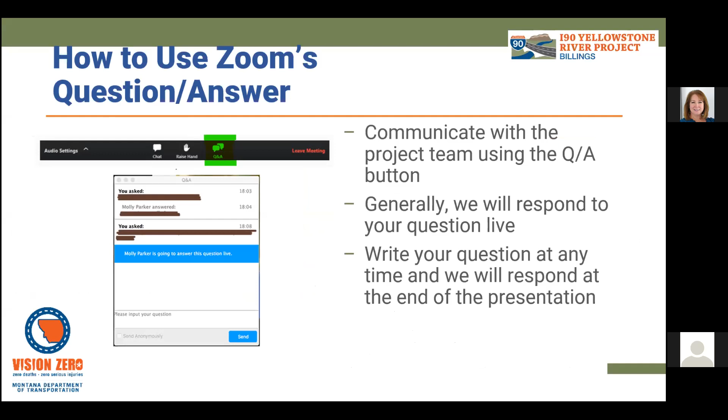The project team consists of consultants working collaboratively with the department, including Rod Nelson, MDT District Administrator for the Billings District; Mike Taylor, MDT Billings District Pre-Construction Engineer; Mark Studt, MDT Consultant Project Engineer; Dustin Hirose, HDR's Project Manager. Next is our road design lead, Tessa Wermers, who works with Sanderson Stewart, HDR's teaming partner. Lastly is Jon Schick, HDR's environmental lead. You've already met me, Lisa Gray. I'll be your point of contact.

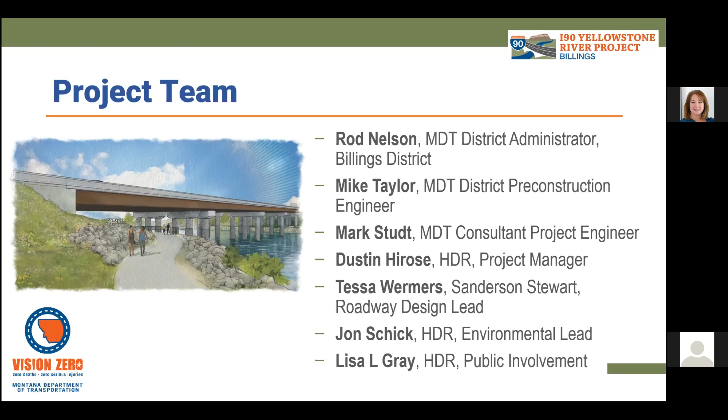Thank you, Lisa, and thank you everyone for joining us today. My name is Mike Taylor, and I'm the Billings District Pre-Construction Engineer for the Montana Department of Transportation. Public involvement is a vital component of MDT's project development process, so we're very appreciative of the opportunity for sharing information about this project with you, and in turn we'd like to hear your questions, comments, and concerns. I'll give you a brief overview of the I90 Yellowstone River project, and then Dustin Hirose with HDR will be presenting the project design in more detail. The entire presentation should take about 30 minutes, and then we'll open up to questions and comments.

The project is led by MDT in cooperation with the Federal Highways Administration, Yellowstone County, and the City of Billings. The Montana Department of Transportation has contracted with HDR to be the lead project engineer, as well as the public information coordinator. The goal of the project is to meet safety and capacity needs on Interstate 90 in Billings. We plan on doing this by widening I90 from 2 lanes to 3 lanes in each direction between the North 27th interchange and the Lockwood interchange. We'll also need to reconstruct the bridges over the Yellowstone River and the Talen Energy Railroad Spur line.

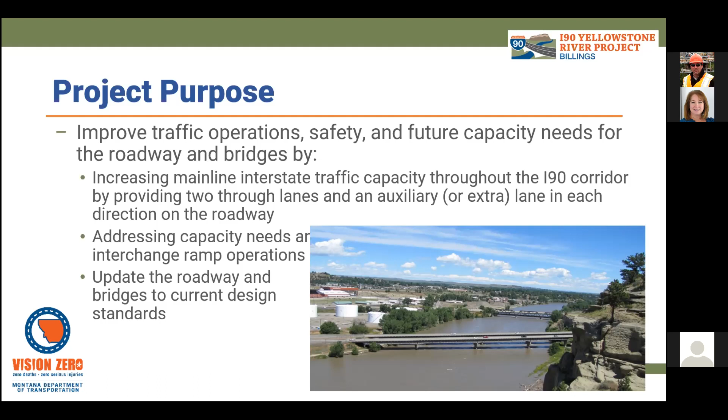So with that, Dustin will speak to you about the project in more detail, but again, please don't hesitate to give us any questions, comments, or concerns that you may have. If you prefer, you can email the project team at any time after the meeting. The project contact information will be shown at the end of the presentation. Thank you again, and I'll turn it over to Dustin.

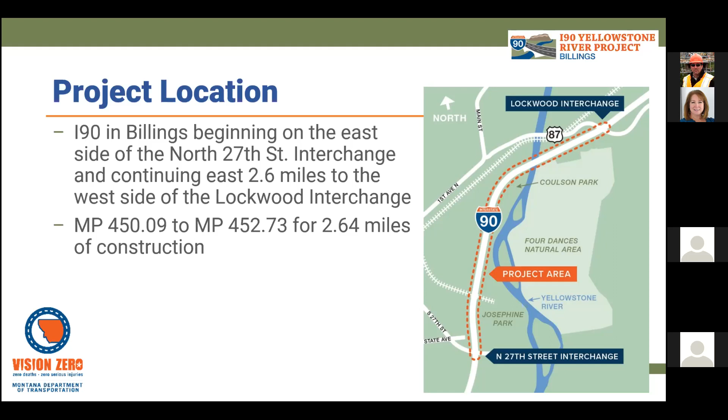Thanks, Mike, and thanks, folks, for joining us on this presentation today. Just to recap the project location, because we do have a few projects out there, and to avoid confusion, our project, the I90 Yellowstone River segment, is located on I90, within the city limits of Billings. Our project begins at the top of the 27th Street interchange, then heads north, or eastbound, over the Talen Energy Rail Spur, over the Yellowstone River, and ends at the top of the Lockwood interchange. Technically, our project begins at milepost 450.09 and ends at milepost 452.73, for about 2.6 miles worth of work.

A little bit of history about the project: it really began back in 2012 upon the completion of the I90 corridor planning study. That study looked at roughly 20 miles of interstate through the Billings area and how the interstate would be impacted by the anticipated growth in the area. The goal of that work was to identify needs along I90 that could address operational issues, possibly safety issues, and ultimately capacity needs associated with that growth. As a result of that study, multiple projects were developed, and our project, the I90 Yellowstone River Bridge segment, is one of them.

This section of interstate was originally built back in the 60s, and there's been some miscellaneous work since then, some pavement maintenance, and some guardrail updates on the bridges, for example. But it was last paved back in 2000, and the infrastructure is aging and in need of improvements and upgrades.

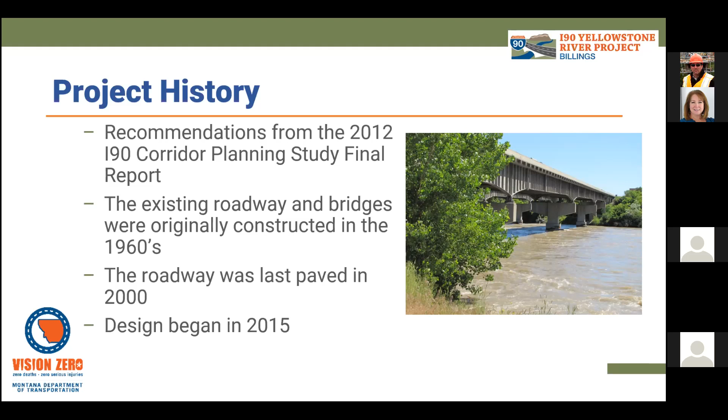Since the planning study was completed, MDT nominated this project for development, and the design began back in 2015, which is when our design team became involved. As it stands now, we're at the very final stages of design. In fact, we're going to be submitting final plans and specifications in about a month, at the end of March. The plan is that we would go to construction in the fall of this year, fall of 2021, and we'll talk about that a little bit later in the presentation.

So a description of the work we're going to do: in a nutshell, we're going to widen the interstate from 2 lanes to 3 lanes. Right now there's 2 lanes in each direction, and we're going to add additional capacity by providing an additional lane, so there'll be 3 lanes in each direction when it's all said and done. Doing that work, we'll update the roadway to meet current design standards.

We're replacing the bridges over the Talen Energy Rail Spur, and one of the focal points of the project is to replace the bridges over the Yellowstone River. In fact, that's a rendering of what those new bridges will look like on the right-hand side of the slide. Replacing those bridges is about half of the total project construction cost, which right now is coming in at about $60 million.

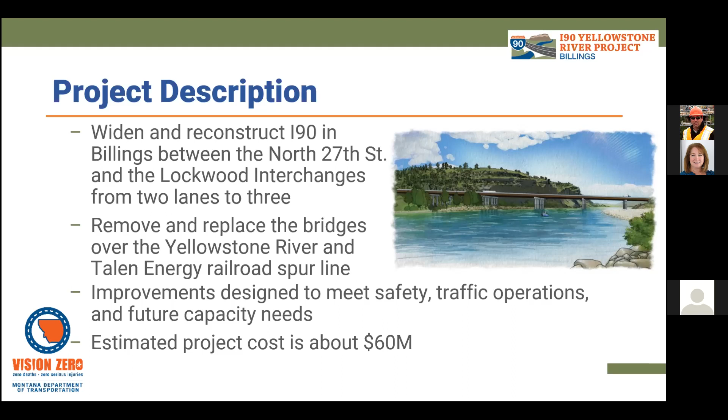Okay, so a little bit of detail about the Yellowstone River structures. Down on the bottom of the slide is a photo of the existing bridges. Those bridges are functionally obsolete, mainly due to inadequate roadway width, and there's really no practical way to reuse them or widen them to meet current needs cost effectively. So really the only option here is to replace these structures.

And in fact, we're going to do that with 2 bridges. There'll be a pair of bridges about 1,000 feet long. It's important to note that we've gone through pretty extensive evaluation of different bridge options for this site, looking at multiple span configurations, different structure types, and construction methods and cost. What we've zeroed in on is a new 6-span structure, with piers located to minimize impacts to the river and provide a balanced, cost-effective design.

Just to clarify, when I say minimize impacts to the river, the configuration we've chosen allows for conveyance of river flows, ice and debris, the types of things you'd expect on the Yellowstone River. But it also provides a reduced footprint compared to the existing bridges, which minimizes impacts on the environment, of course.

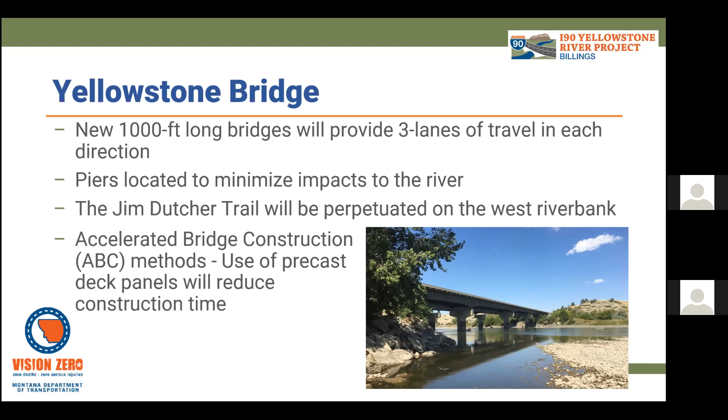In order to do that, we've worked with MDT to incorporate means to accelerate construction, and we're going to do that by using precast deck panels. Compared to the traditional method of building a bridge deck, where you need to form it, place rebar, pour concrete, and allow the concrete to cure, the use of this precast deck panel design should significantly reduce the construction schedule and reduce the risk of construction extending into the winter season, because we really want to avoid having traffic maneuvering through crossovers or in a head-to-head configuration during that winter shutdown period.

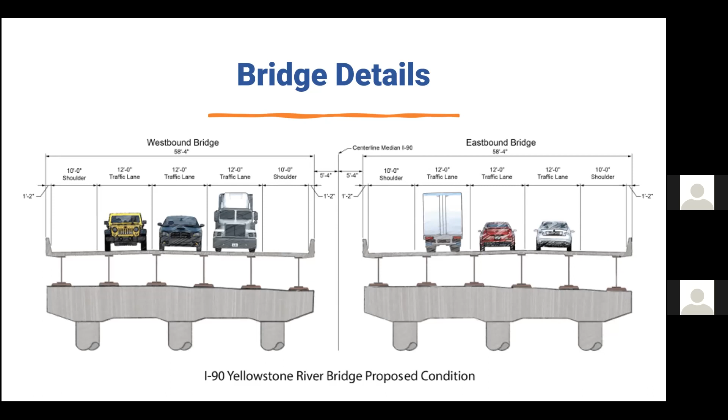In this case, we're going to replace these structures with a precast buried concrete arch. This arch structure allows us to upgrade the roadway to meet current design standards without having to extend the roadway construction work a significant distance on either side of those existing structures. So from the driver's perspective, you may not even really notice that there's a structure there now.

It'll kind of feel and look like the roadway is just perpetuated over the railroad tracks. Technically speaking, we're correcting the roadway super elevation, which improves safety without the need to raise the elevation of the roadway through that area.

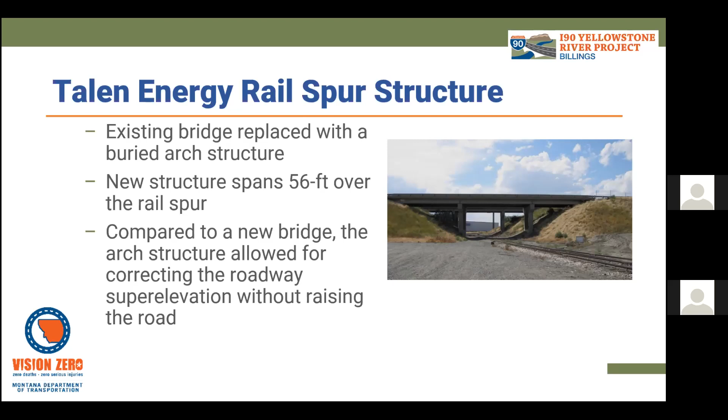And so with that, I'm going to pause and turn it over to Tessa, and she's going to tell you a little bit about the roadway design. Great, thanks, Dustin. Hello, my name is Tessa Wormers. I work for Sanderson Stewart, and I am the road design lead on the project.

The design speed along the interstate for the project design is 70 miles per hour. And the posted speed limit will remain at 65 miles per hour for all vehicles, including semi-trucks.

The I90 roadway will be reconstructed and an auxiliary lane will be added in both the east and westbound directions, as Dustin mentioned earlier. The auxiliary lanes will be constructed from the 27th Street interchange to the Lockwood interchange. The widening for the extra lanes will occur to the inside of the existing driving lanes. This minimizes the need for new right-of-way, and in general, the design for the entire project stays within existing right-of-way.

We will improve the safety of the road by flattening slopes and improving the bank of the roadway around the horizontal curves. We also provide barriers to separate and protect traffic. The pavement thickness is designed to accommodate the high volume of truck traffic along this section of the interstate. A new storm drain system will also be constructed to minimize ponding along the roadway. The concrete barrier will be built in the roadway median to provide separation between opposing directions of traffic and to reduce headlight glare.

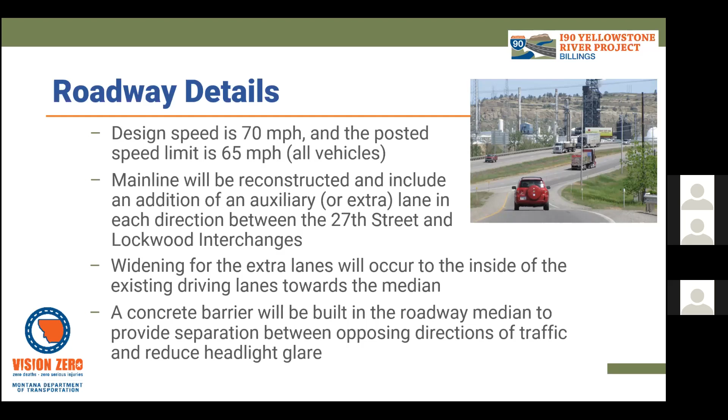The on and off ramps on the east side of the 27th Street interchange and the ramps on the west side of the Lockwood interchange will be reconstructed with this project. A second exit lane and dual left-hand turn lanes will be constructed at the Lockwood interchange eastbound off ramp. The additional lanes better accommodate traffic demands and the high volume of semi-trucks at this location. A second exit lane will also be built at the 27th Street interchange westbound off ramp to accommodate traffic demands.

This is one of the few areas along the project that will require new right-of-way acquisition for the construction of this second exit lane. I will now turn this over to John to discuss the environmental aspects of this project.

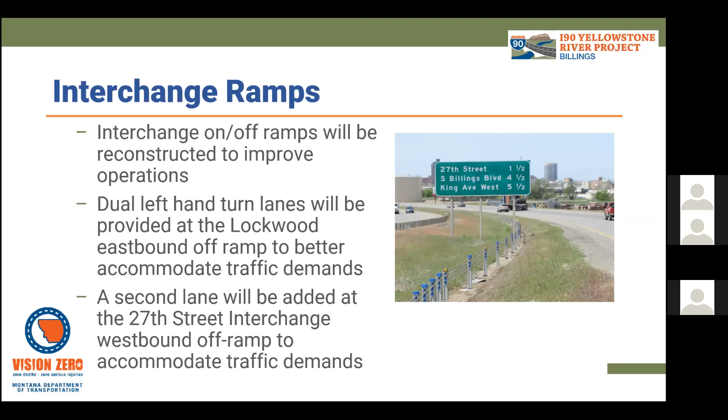Thanks, Tessa. Hello, everyone. My name is Jon Schick. I work for HDR, and I'm the environmental lead. I wanted to speak to a few of the environmental considerations for the project.

The project is receiving federal funding, and that triggers a review under the National Environmental Policy Act, or NEPA. Similarly, it's receiving a smaller percentage of funding of state dollars, which then triggers a review under the state Montana Environmental Policy Act, or MEPA.

The NEPA and MEPA compliance was accomplished through a categorical exclusion level of environmental document. This document and the environmental process in general looks at a broad range of resources and assesses the project's potential impacts to those resources. The categorical exclusion was completed in March 2019.

One of the predominant natural resources in the project area is the Yellowstone River. Just the nature of the project and the replacement and construction of new bridge structures requires kind of a strict adherence to certain conditions related to maintaining the quality of the river. This project will seek to minimize the impact on the river through use of environmental standard specifications and special provisions, which are essentially directives that will be given to the construction contractor to follow certain state and federal environmental regulations and procedures.

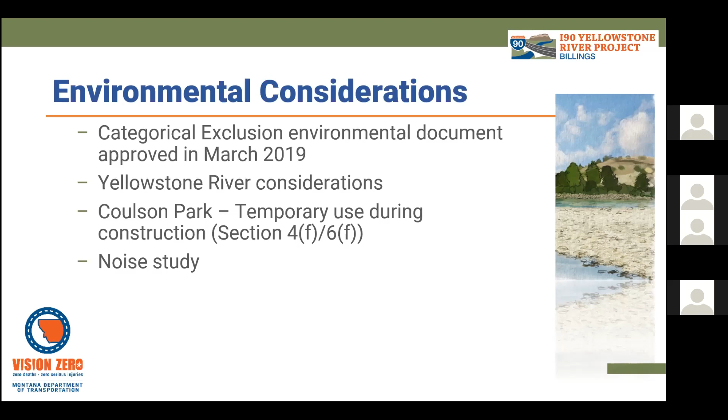Thanks, John. Regarding the project schedule and next steps, as I mentioned earlier, our plan is to begin construction this year, in the fall of 2021. The design is essentially complete, with final designs being submitted at the end of March, and between then and the fall the project will be packaged up and advertised for bidding.

This fall, we hope to begin work by building some traffic crossovers and irrigation crossings that go underneath the interstate to set the stage for the main work in the 2022 construction season. The first part of that work will include building the westbound facility, which will take most of 2022. The following season, 2023, we'll build the eastbound facility. Ultimately, there'll still be a need for some cleanup, final striping and signing, which will occur in the final phase in 2024.

During construction, we're going to be maintaining two-way traffic at all times. During the winter shutdown period, our goal is to open up the interstate again fully so there are 4 total lanes, 2 in each direction. We're currently looking at options to navigate oversized loads through the project area during construction, and we have a plan for an emergency detour if there's an accident or the interstate needs to close for some reason, with a contingency plan to manipulate traffic around that area.

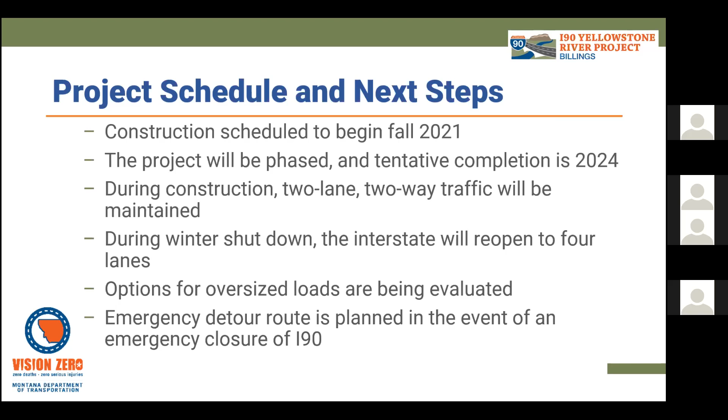Thanks, Lisa. Thank you, Dustin, and a big thank you to all of our presenters. As previously mentioned, MDT will use public input from this online meeting as the project moves forward and will continue to work closely with the community and other stakeholders. MDT will host other meetings to discuss project construction. We hope you will stay involved with us.